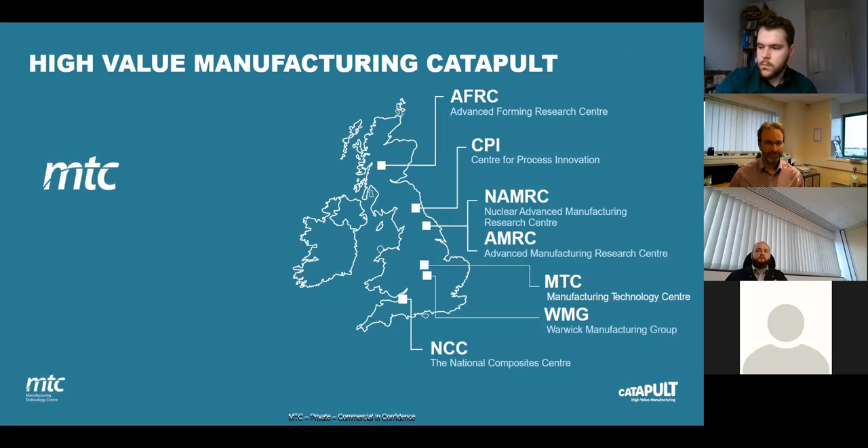So briefly, the MTC is the Manufacturing Technology Centre. We're part of the High Value Manufacturing Catapult. Along with our peers, we are all geared to help any UK manufacturer be more competitive on the global stage. Amongst our peers, we are the new kids on the block. We've been open 9 years, but in that time we've accrued 800 employees, all with the same mission to improve quality, cost and delivery performance of UK manufacturers, always with an eye on new technology.

We help you de-risk and accelerate those investments to get the best return in the quickest possible time. We have a huge array of technology based just in Coventry off the M6 Junction 2, all the latest automation, robotics and 3D printing, and we are in fact the National Centre for Additive Manufacturing. So that's a very brief introduction.

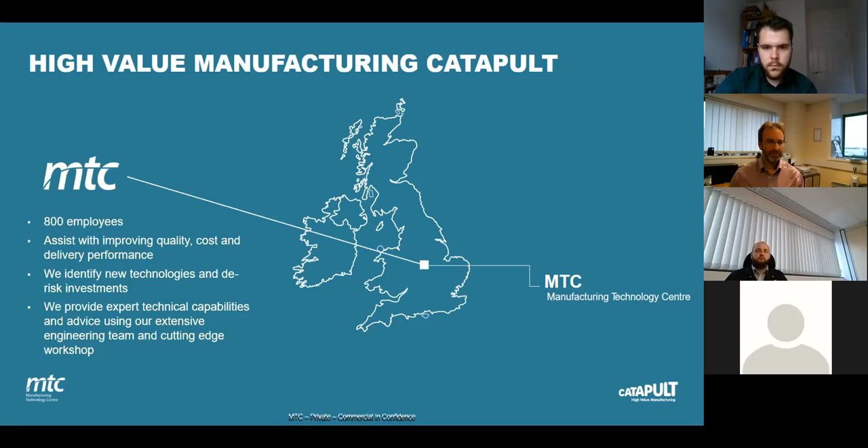Thanks, Nigel, for that blistering introduction. I should mention quickly that photo of me is pre-lockdown. I've gone a bit yeti since then, in the spirit of honesty.

In any case, I'm going to talk you through, first off, why design for automation is an important activity to undertake, and then go on to look at various different things that you need to consider when you're going through the process of designing your components and products for automation. So crikey, that's an accelerated program. This is the first slide. So what's the point of the entire enterprise of design for automation?

There is no question that automation has the potential to multiply your productivity and expand the bottom line. In fact, every country out there with a higher manufacturing GVA than us has adopted more robotics and automation than we have. There's one exception, and that's India, who still have a lot of what I call manumatic production going on, but they installed twice as many systems as we did last year. So they have a plan, they're sticking to it, and we're about to be lapped there. We have a bit of a shortfall in terms of automation adoption in this country, which is something I'll touch upon later on.

Automation systems, whilst they can offer an enormous amount of added productivity, also have the potential to screw things up in quite an impressive way. There's an old expression: if to err is human, if you really want to screw things up, you need a computer. The same kind of goes for automation, but we'll talk a little bit more about that later on.

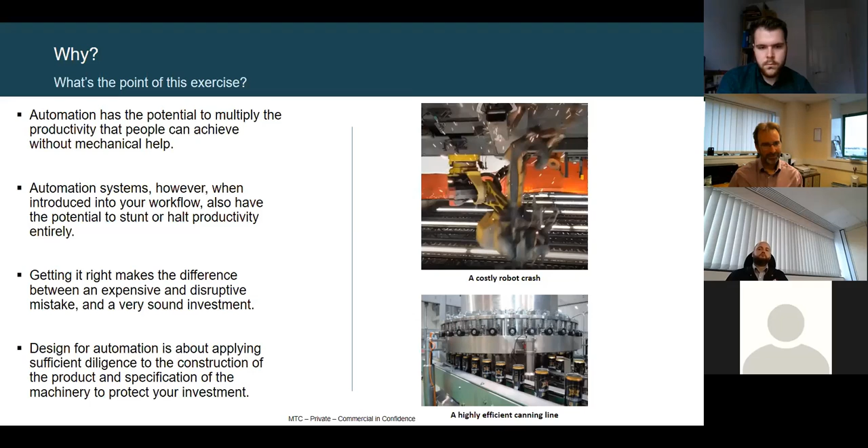If we move on to the next slide please, I'm going to elucidate on some of the points I've made. So you have a manual process. Somebody's putting value into something with their hands, and you essentially have dominion over your productivity, over the quality of that thing passing in front of you on the workbench, and how quickly those things move through. As a side note, human beings are pretty good at dealing with stuff that arrives disordered in a box, jumbled up - flexible elements like connectors, slippery parts like bits of onion, irregular stuff with no indexing features to give you a key as to orientation or location. Humans are also pretty good at stuff that requires dexterous manipulation, really fine stuff you can do with tweezers.

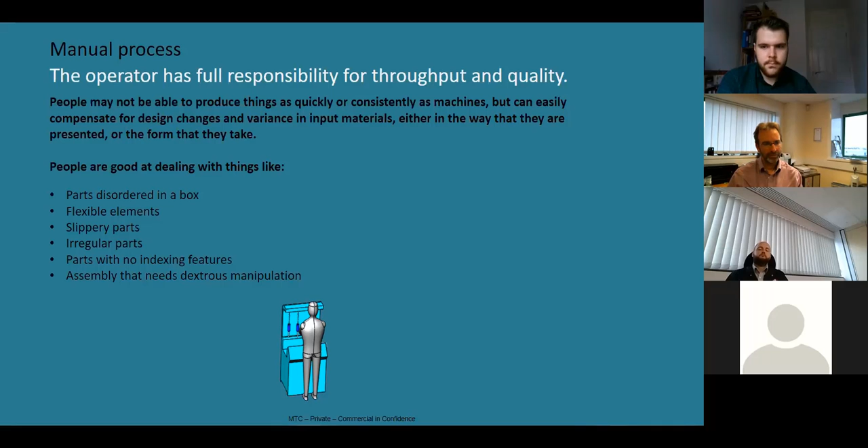Move on to the next slide please. Suddenly, if you install an automation system, that system is effectively in between you and your capacity to generate value, so you better make sure it works. There's a very familiar list here of stuff that automation systems are not particularly good at dealing with: parts disordered in a box, flexible stuff, slippery stuff, irregular parts, parts with no indexing features, and anything that needs really fine work.

I make this point because the whole backbone of designing for automation is to make sure that you have not just the right tool for the job, but the right job for the tool as well. So if you're going to put something in the middle of your workflow, effectively between you and productivity value, you have to make sure it's going to be as robust as possible, and your solution is as reliable as it possibly could be. Those last three slides are just to make sure we're all banging our heads against the same wall and understand that design for automation is a valuable activity because it supports automation, which can make your business more productive.

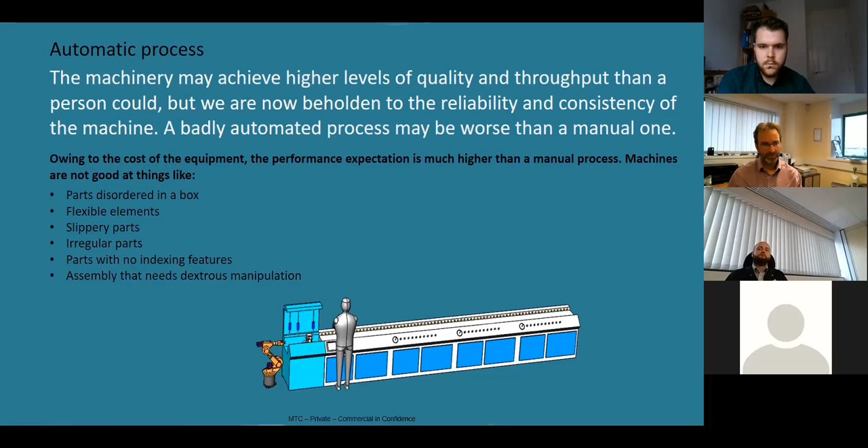We can move on to the next slide, please. Sean.

Some of the conversations we have with people are around the fact that they have an existing product being manually assembled and they'd like to automate that process. They've seen things on YouTube and out there on the internet, mostly academic presentations or presentations by corporations trying to show off their technological prowess, and they make the argument: look, there's some really advanced robots out there, I know that because I've seen them. I'll talk you through quickly why the answer should never be to go straight to the advanced robot use case, and I'll define that in a second.

On the left-hand side, I've got a very basic pick and place situation. The parts always arrive in front of the robot in the same orientation, in the same position, and the robot can fully constrain them, take them from the same place, undertake the same operation with a positive grip, then put them back in a different designated fixed position. That's pretty straightforward and pretty robust. On the right-hand side, there's a more advanced robot use case where parts arrive in front of the robot disordered in a bin, and the robot has to basically sort this out. The parts may also be differing. There are technologies out there that will do that for you.

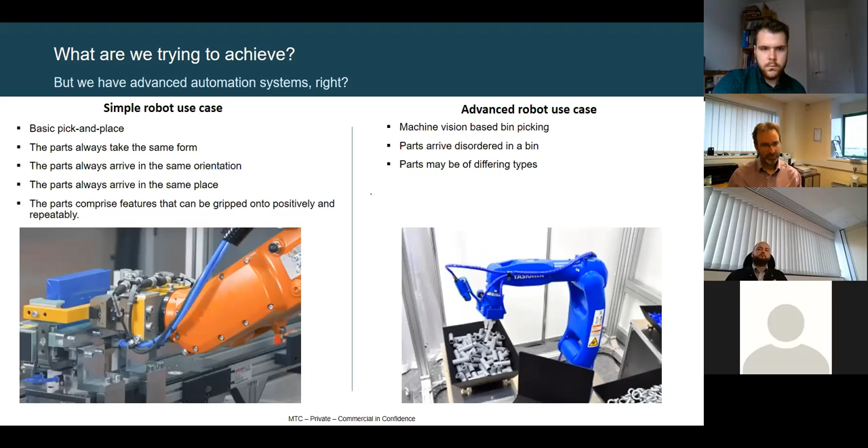So you've got to acquire an image with a camera system of some sort, filter it so you get just the bits that you're interested in, recognize the specific objects within that filtered image. You've got to work out the orientation, work out where exactly those parts are in space, and then calculate your approach path so the robot doesn't crash into anything, calculating how you're going to grip it and what your strategy is going to be.

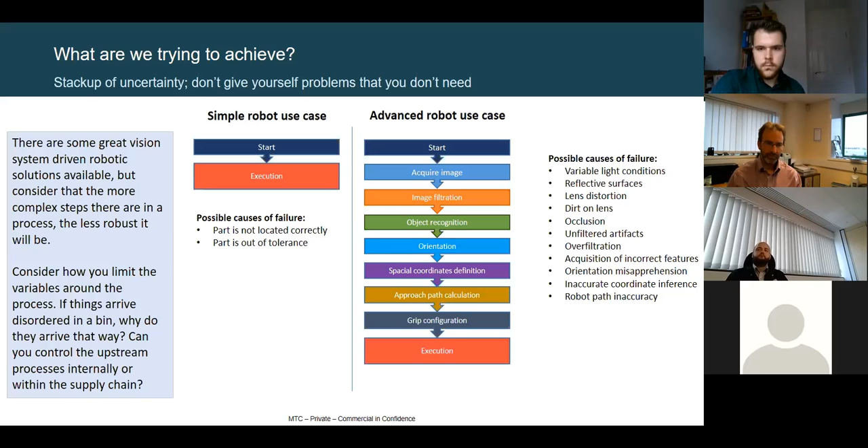If we could just move on to the next slide. The reason these systems have been developed and are market ready and exist is because sometimes you literally have no choice. And I obviously completely understand that when you have heterogeneous parts coming into your production system.

Let's say in the example on the right hand side, these are bits that nature gives us. You don't get to specify these parts with a data sheet. But having said that, even though we know all the parts are going to be subtly different colors, subtly different shapes, and in different places, you would still make every best effort to limit the variables, which is why they've been grown in boxes and the fruit's always pointing down.

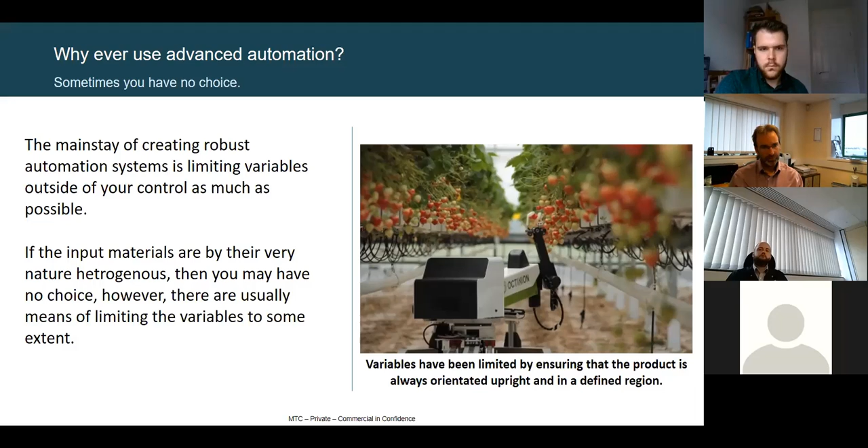So at least the machinery has a fighting chance of identifying a rough blob in a region that's kind of expected. If the alternative is trying to send a robot into a completely unstructured environment where fruit could be growing in any direction, you've got a hell of a lot more variables to cope with. So bottom line, it's all about trying to eliminate all the problems that you don't need. Move on to the next slide, please.

I did tell you I like my stupid illustrations, didn't I? The point behind this one is that the business of identifying a task that's currently being done manually, let's say a product assembly task, and putting a robot in place of somebody as a one-to-one swap, is rarely an effective way of doing things. In fact, I've never seen a case whereby it's been particularly effective.

And the obvious reason is that humans and robots have entirely different characteristics. Whether it's your load capacity or the fact you have 10, well, most of us have 10 digits available to grasp things and manipulate stuff. We've got this, I put 7 hours a day uptime there, but in my case it's certainly coffee dependent how much productivity you're going to get at any given point.

But obviously humans are capable of doing fine, detailed, highly dexterous things and making decisions on the fly, making determinations about whether a component's slightly bent or something slightly misaligned, and dealing with it.

Robots, on the other hand, can work semi-continuously. They've got a different operational range. They can't adapt immediately to things which are slightly inconsistent, wrong, bent, or unexpected. So trying to directly port the same production process from a human to a robot is, because of these characteristic differences, a very inefficient way of doing things, and it's likely to result in a poor investment and a very ineffective automation solution.

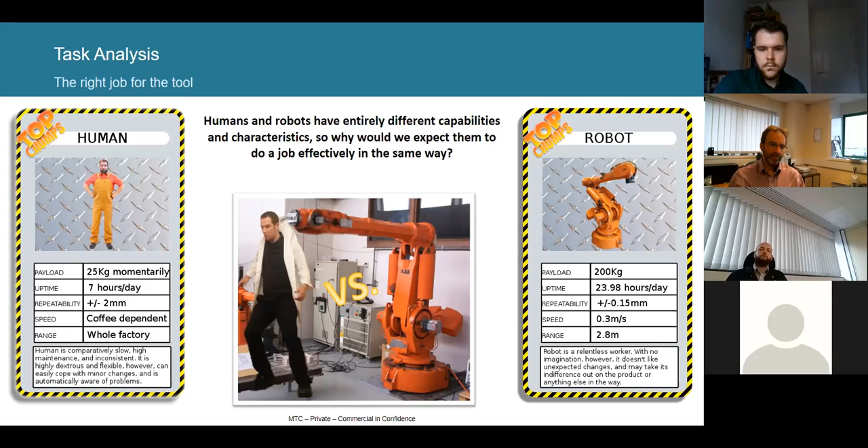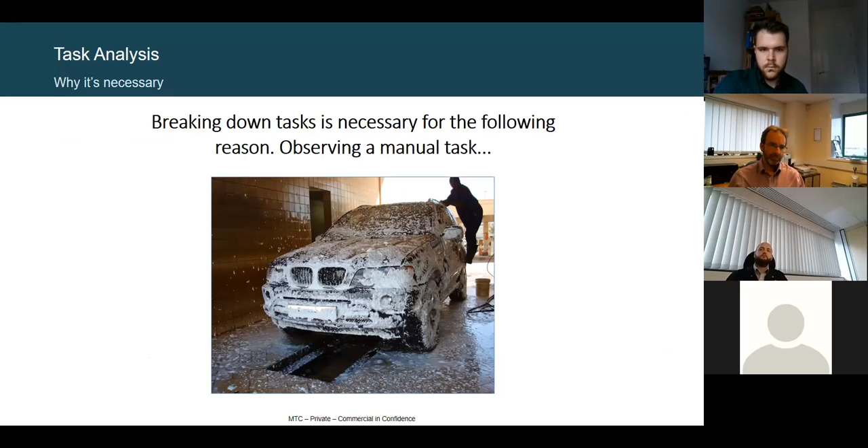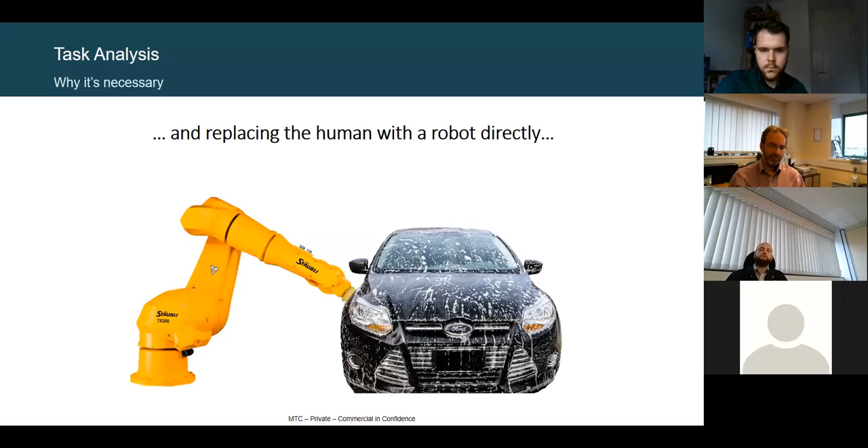I'm going to go into a really kind of dumb example, but just to get the point across. Here's a human being washing a car, not an uncommon sight. So you think, well, we need to automate that process, right? Because we could lower the cost of washing cars. Well, if you do it this way, you can't lower the cost of washing a car. That'd be an incredibly slow way of doing it, with all the ancillary technology you'd have to connect to the robot to pick up all of the features on the car, and how slowly you'd do it. Whereas if you've actually done a proper task analysis and understood what you're trying to achieve, you're going to end up with something a little bit more recognizable, which in this case is something more like a special purpose machine.

So what I'm getting to is it's all about understanding the tasks that you need to undertake and breaking them down and putting them back together again for an automated circumstance, for an automated production scenario.

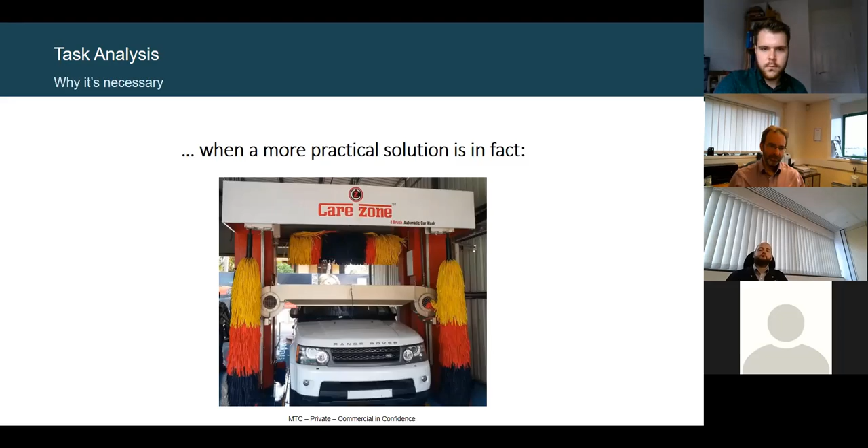And once again, I'm going to drum into this one a little bit more. So what we'll do when we go into a production environment and look at automation, look at the most efficient way to do it, is try and strip away all of the sort of legacy human processes that exist, and try and get down to exactly what we're trying to achieve. So if a human being would normally screw something in with a screwdriver, you don't just give a robot a screwdriver. You look at exactly what you're trying to achieve.

Top level, what we're trying to achieve is some way of fixing this product together. Okay, how are we going to do that? What's appropriate for automation? The example I've given you here is that a manual process involves several human steps. So, I don't want to have any arguments about whether or not the milk goes on the tea bag first or the other way around. I know this one can get really contentious, but in general, if you put the kettle on, you get yourself a mug, you get the tea bag into the mug, water into the mug, agitate it in some way, get the tea bag out, milk in. I think we're all fairly familiar with that process.

But then if we look at the middle, what exactly are we trying to achieve? Let's forget all the human steps. What are we trying to achieve? Well, at some point, the tea and the hot water need to meet each other and get agitated. And at some point, that stuff's got to end up in the cup. And the milk's got to end up in the cup as well. And at some point, that stuff's got to leave the system. It's got to be handed out to whoever wants the tea.

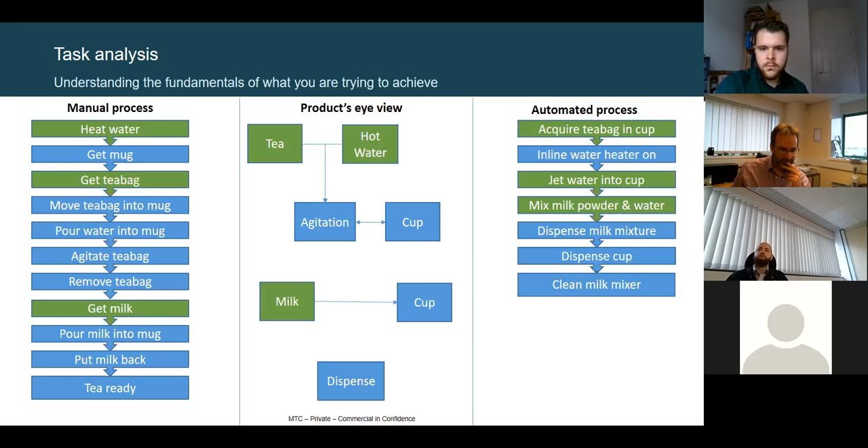So I'm going to move on a little bit. There are questions around what kind of machine you might want to use for your automated process. If you approach a robot supplier for your automated solution, you're going to get a robot. So one of the things I talk to people about is making sure you've done the task analysis and understand your business case, so you can choose the right kit and go in as the intelligent customer, knowing what characteristics you need.

Robotic systems are terrific if you've got a relatively low production rate and need flexibility — maybe you have an aspiration to make every product subtly different or customized, or want to reuse that asset in the future to do something different. That may well be the answer for you.

However, as production rates go up, you might want a special purpose machine which gives you a particular configuration but not full flexibility of your product. Or if you've got things whistling through at a rate of knots, maybe it's just an actuated tool — literally something like a punch that makes thousands of drinks cans every hour or so. There's a different business case behind all of these things, and it's crucial to understand what your margin for value is, along with all the other characteristics you need, so you can choose the right type of equipment.

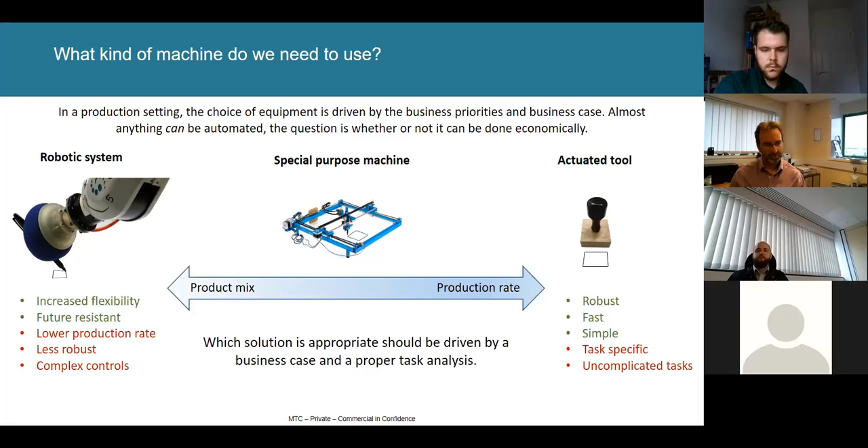So I'm just going to round up the point about automation systems as opposed to product design — product design is the next section. But important things to note: understanding what value your automation system can bring you is crucially important, so you can specify the equipment in such a way that you don't end up blowing the business case out of the water and having a rubbish investment.

Understand what interactions have to happen — that's the product's eye view. That's making sure you've taken into account absolutely everything that needs to happen to those input materials, working for that rather than for an existing process that involves people. You can establish which different technologies you'll need based on that, and reaffirm your business case based on some ROM costs. There may still be a business case even if it's not for automation, and you have somebody with smart tools, or there's still a manual part in the process. All of these things need to be calculated.

I've talked about stuff arriving disordered in bins, but you can always address your supply chain and try to deal with those problems. It's much quicker and cheaper to get your suppliers to install a bit of automation so that stuff comes singulated off a conveyor belt on their site and is packed up in a nice matrix container, than it is for you to sort the problem out downstream when you've got a box full of jumbled up stuff. I'll talk a little more about that in a second.

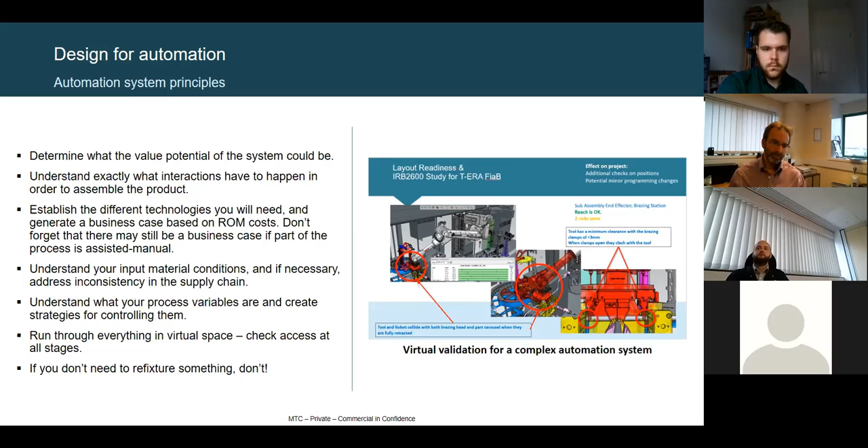Use these tools. They can avoid costly mistakes and they can really steal a march on time. Basic automation principle: if you don't need to move something about, don't do it. So design for automation has an awful lot to the subject, and I'm going to give an overview rather than depth on any particular part, but that's one of the overriding principles.

So indexing features. Once again, machines aren't inherently clever. Obviously, you can do things to try and make them respond to the product or environment in some way with clever control systems. But once again, if you don't have to make it complicated, don't. So nice indexing features on all of your parts to establish positive repeatable grips on things, absolutely crucial. Simplest way of making sure you repeatably pick and place things or manipulate things.

And there's an example of a robot picking up a tote box there. By the way, I should mention in the next couple of slides, a lot of design for automation principles are very, very similar to just great design for assembly principles in any case. So it's good practice whether or not you're putting a robot in.

It's important to remember, if you are putting these indexing features in, any features associated with helping the robot assemble things, you need to control those features. You need to make sure that they are toleranced, and you need to make sure that your supply chain has a quality system in place to maintain the consistency of those indexing parts.

Lead-ins, where possible, you really want things to self-locate and to nest. Robots you can consider to be completely rigid systems. So we'll move on to the next slide and I'll talk a little bit more about that.

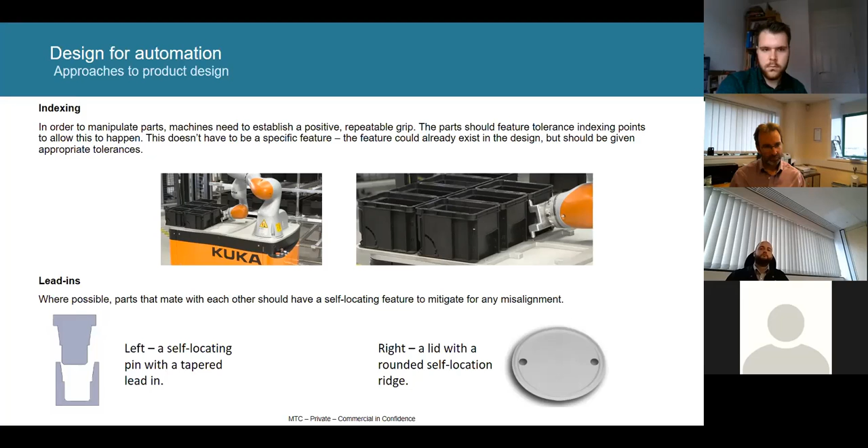Self-locating and self-aligning features are great anyway. Oh, it's not the slide I thought it was. But yeah, they're great principles in any case. As I say, things over time will drift, they will move. So give yourself every possible chance to absorb any misalignment. I will talk in a second about how you allow a robot to soak up misalignment without resorting to really advanced vision systems.

Grip type, once again, I think most of this stuff is fairly straightforward and fairly well understood. But you might see, out in the world of the internet, whether it's YouTube or marketing materials, some grippers that can pick up all sorts of things. So on the right hand side, that's called a jamming gripper. It sort of morphs its shape to surround almost anything, and it can pick and place almost anything.

The problem is, you don't know where that part is within your grip. It's not an indexed repeatable grip. So you've given yourself a problem: you need to work out where that is. And what's going to happen is if you pick it up and it's in slightly the wrong position, you just carry that error over to wherever you put it down. So if your grip isn't self-aligning and retaining, you just carry errors over.

And the only alternative to that is having a really expensive advanced vision system to try and give you some understanding of where that part is within the grip. The middle image is some converging parallel grippers. Once again, you see them quite commonly. However, clearly, if parts can move in your grip over, let's say, 10,000 manufacturing cycles, parts probably will move, and then you might get a crash, break the gripper, the robot trips out, and you lose time.

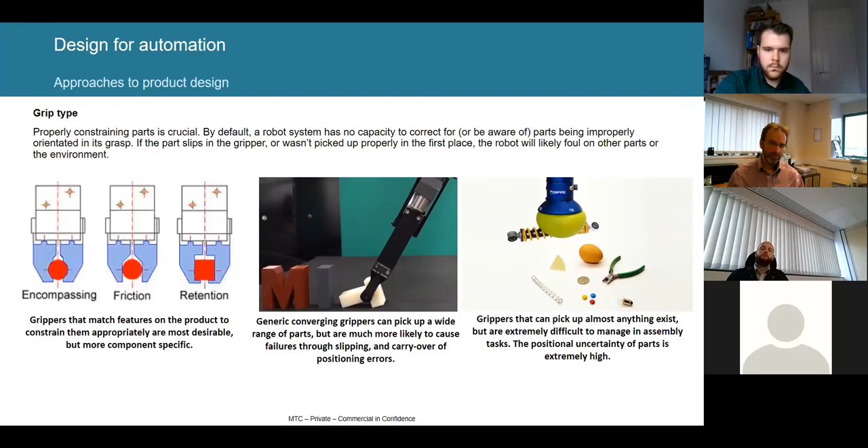Much better, and I'm moving from right to left here, much better is to consider every component having fully constrained gripping features. If we could just move on to the next slide, please. A little bit more about that. So, sorry, and this is a roundabout way - I'll finish off the fully constrained thing, but anything that allows you to pick up something repeatably with controlled features, such that as you grip it, it will position itself in a predetermined position relative to your gripper. That's what you want. You want control of the parts.

Compliant heads, we use them to soak up misalignment. So there's an illustration of a grinding process on the left-hand side, and a compliant head being used to exert a given radial force against the part. These components many of them work on the basis of a pneumatic pressure signal, so you can say how much deflection is allowable and in what axis. So you can soak up angular misalignment, whether it's compressive or torsional, as I've illustrated there. They're very, very useful components for giving yourself a set amount of possible deflection.

Possible movement between the robot and the parts being fitted together, because the robot has no imagination. Consider it to be a completely rigid system, and so a 0.5 millimeter misalignment, the robot is just going to drive one part into the other and either fault out or bend things, which is why this stuff's important.

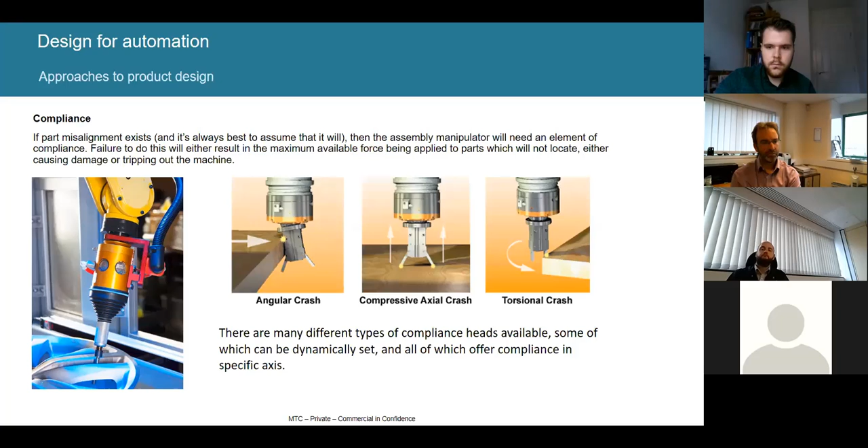Next slide, please. I'll whistle through these.

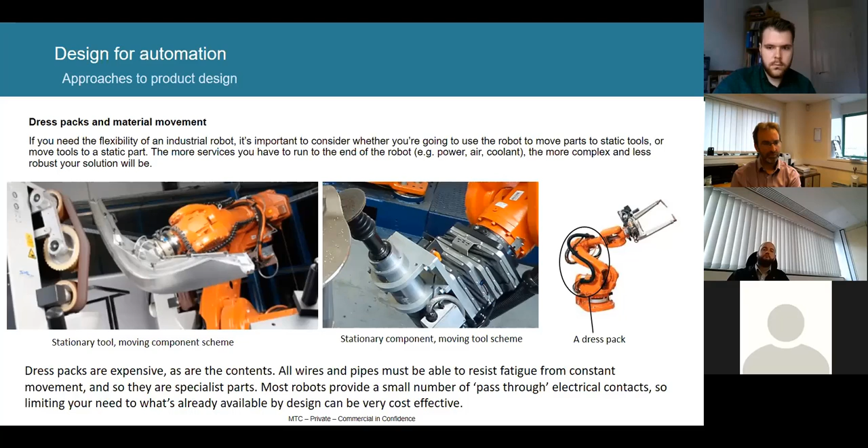Another thing to consider when automating: am I going to put my components on the robots and have the process equipment stationary, or the other way around, moving around the process equipment? You need to consider all the services you have to move from the base of the robot to the flange of the robot, since those service lines are quite expensive because they're designed to move around a lot and withstand a lot of different cycles. You also have to consider how much power you need to get to the flange of the robot if you've got a tool on it, and the weight of your components. There are a number of things to think about, but it is a consideration.

If we can move on to the next slide, please.

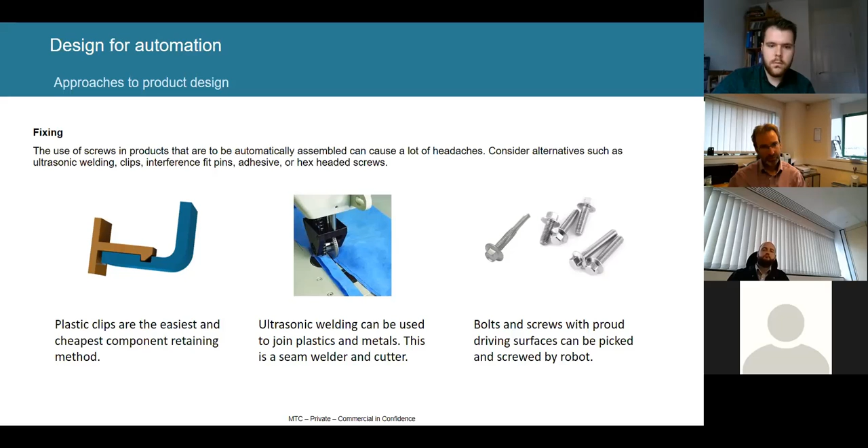Move on to the next slide, please, Nigel.

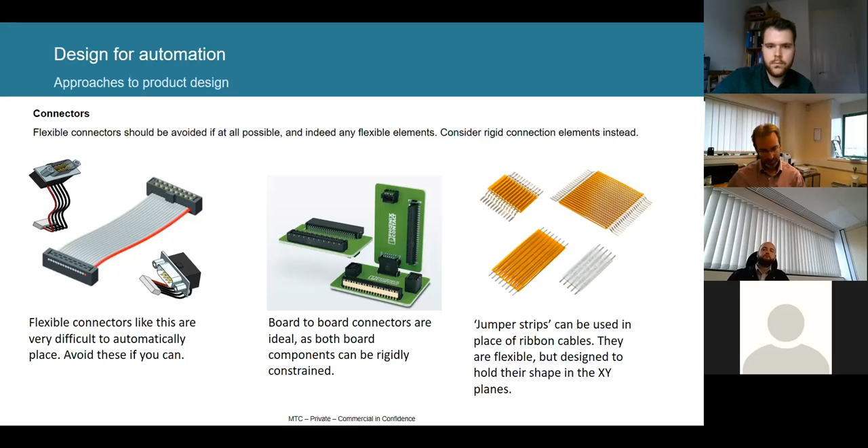Connectors—avoid flexible connectors wherever possible, they're extremely difficult to work with. Instead, consider board-to-board connections or jumper strips, which are made to be rigid so you can pick and place them without things moving around too much. The other alternative is to put rigid plastic or other material webbing around the flexible connector, so it all stays in the right plane and you can pick and place it without things moving too much.

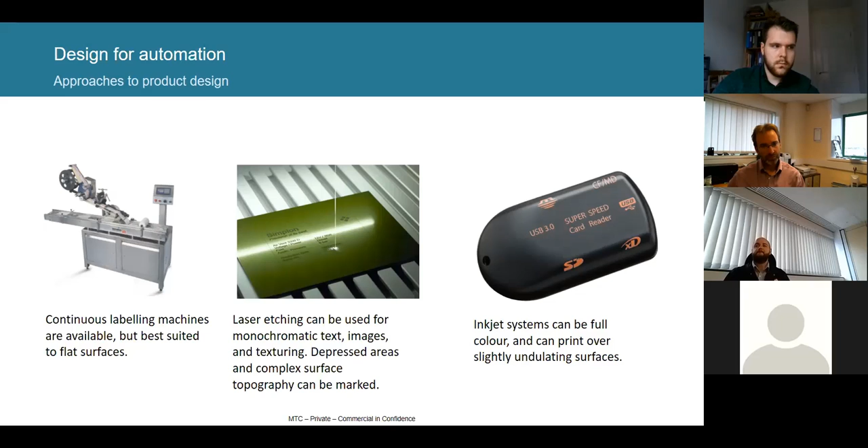If we can move on to the next slide, please.

Last couple of slides—stackable matrix trays. I already talked about the possibility of dealing with inconsistent or chaotic part delivery, with parts in a box in the supply chain. If you can come to an agreement and issue a stackable matrix tray like the one illustrated on the left, the parts are always oriented in the right way in fixed places, so you've effectively gotten rid of an entire automation headache you'd otherwise have to deal with. As I say, when they manufacture the parts, chances are they're singulated and oriented, but then they just drop off a conveyor belt into a bin typically, and you have to deal with the problem downstream.

Move on to the next slide, please, Nigel.

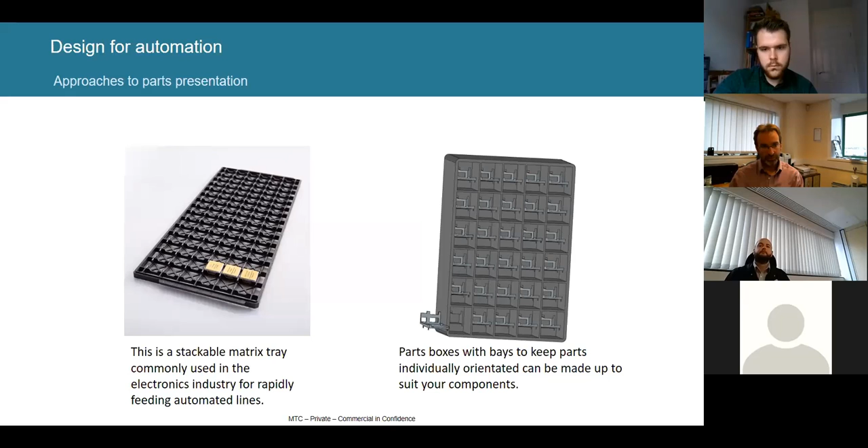I realize I'm running over time, so I apologize, but I'll summarize with this last slide. Ideally, with a new product introduction—and I know that's not the reality in a lot of people's lives—if you're introducing new products, the product and automation tools should be designed at the same time in a multifunctional team. The antithesis of this is unfortunately the typical situation where someone designs something beautiful and throws it over the wall to manufacturing engineering, who have to work out how to put it together, who then throw it over the wall to the people who have to assemble it.

That's clearly going to introduce some issues into the efficiency of production. But the bottom line is: make sure something's automatable, or that the assembly of something is automatable, by developing the tools and the product at the same time.

I've talked about making sure the automation-critical features are controlled in the supply chain. That's specifying parts on drawings which have certain tolerances and holding that to a quality system.

Anticipating product changes down the line - clearly, if your product is going to change at some point, you need to make sure you have that flexibility within the automation system you specified to deal with it. It sounds like an obvious point, but it's amazing how many people make that mistake.

The business case should be fully understood. If it feels like an opaque thing to you, it's the sort of thing we can help with. But it's crucially important because this is all about the bottom line - understanding what value you can achieve and how far you are towards the margin of that possible value with the system you're trying to specify.

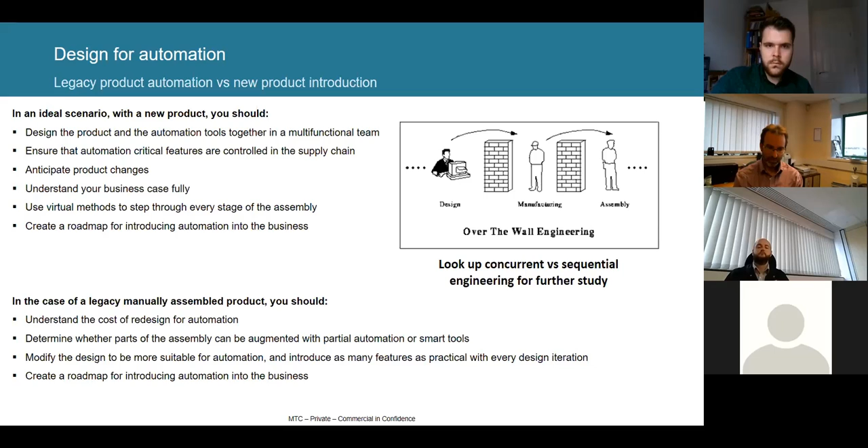Road mapping, again, crucial. Once again, I apologize - I think I've run over a little bit, but that was the last slide I've got. So I'm going to hand back to Nigel, I think.

Thank you, Phil. Thanks for that - there's a lot of content, and well done to get it in the time, plus or minus a few minutes. A couple of questions: you mentioned towards the end design for manufacture, design for automation. What if I only make to print? Will that weaken the business case?

Not necessarily. The automation can be applied to different parts of that scenario which aren't necessarily associated with the core business of putting together a custom product. So it might be materials prep, it might be associated with quality - there are several other things you could consider.

And once again, if you're building to print, don't forget - presumably you're talking about a situation whereby someone's given you the design and you're just building it. Is that what I'm understanding from print? Yep.

Yeah, there's no reason not to then apply stuff like smart tools to the product assembly, on the basis that you can take the tolerances straight off the customer requirements and drawings and pump them into the smart tools to ensure you have that level of quality and repeated output.

Okay, I guess you could also climb the wall and maybe go and talk to the customer in the first place, to see if he could redesign it himself a bit to help you. Yeah, absolutely.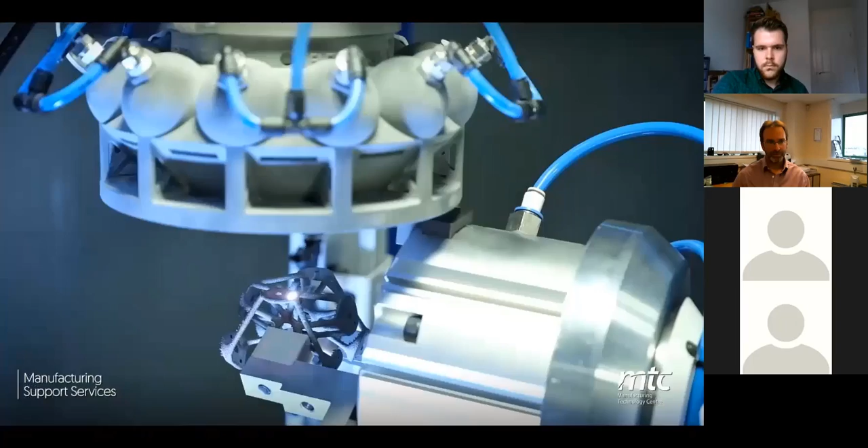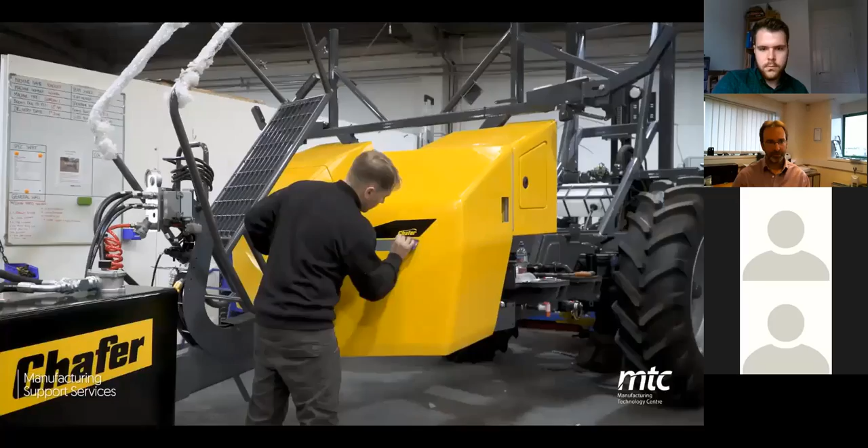We can deliver value to businesses quickly. Working with clients, strengthen their businesses, using their challenges and the technology that's right for them. £50 million worth of the latest manufacturing technology. Fresh thinking that you could not access any other way. Doing things out of the ordinary is not out of the ordinary for us. Working with the MTC has been fantastic. I believe this is a smart approach to business. We've turned over 30% more orders. We actually haven't employed anybody else. We've managed to double our turnover in a period of 2 years without increasing our overhead costs. We focus on helping Great British manufacturing get even better.